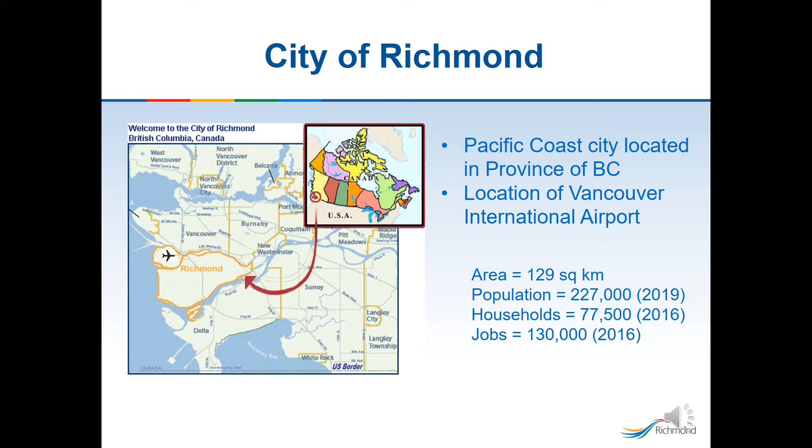What triggered the need for the study? From 2013 to 2017, there was a substantial increase in vehicle-to-vehicle collisions in the city. In fact, at the study locations, the number of collisions increased 8.7% on an annual basis, which outpaced the population increase of 1.7% per year in the same 5-year time frame.

This increase in collisions and continued concerns from the public led the city to undertake a citywide collision review. The city partnered with the Insurance Corporation of BC and hired ISL Engineering and Jeff Ho Engineering consultants to carry out the study. There are two key study objectives.

One, we want to identify and prioritize locations in a systematic manner. At the end of the day, we want to make sure the process and methodologies are objective, transparent, and easy to understand in how the highest collision-prone locations are identified. The second key objective is to determine what safety improvements will achieve the greatest safety benefit.

So with that brief introduction, I will turn the presentation over to Paul, who will be going over the details of the study methodologies. Paul?

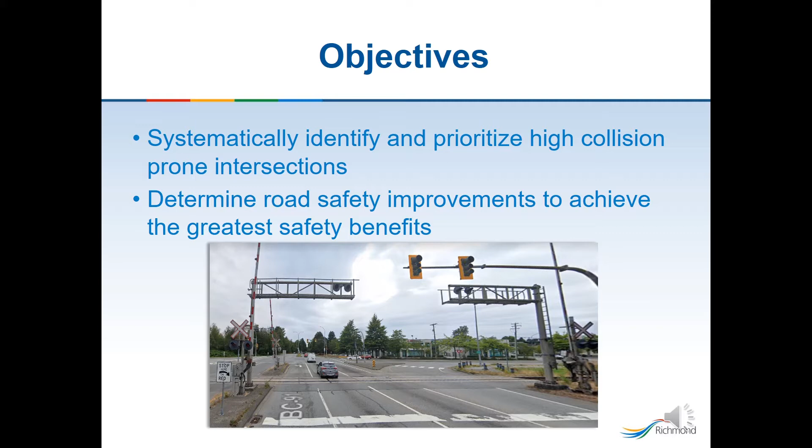Thanks, Fred. The first step of the methodology was the initial screening, which consisted of reviewing ICBC claims data and conducting a safety performance analysis. Based on standard practice for road safety review studies, ICBC claims data for a 5-year period beginning at the start of 2013 to the end of 2017 was collected and reviewed for citywide intersections.

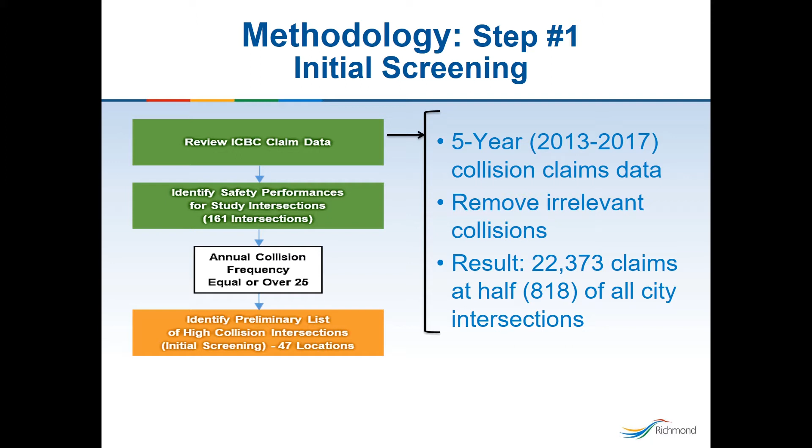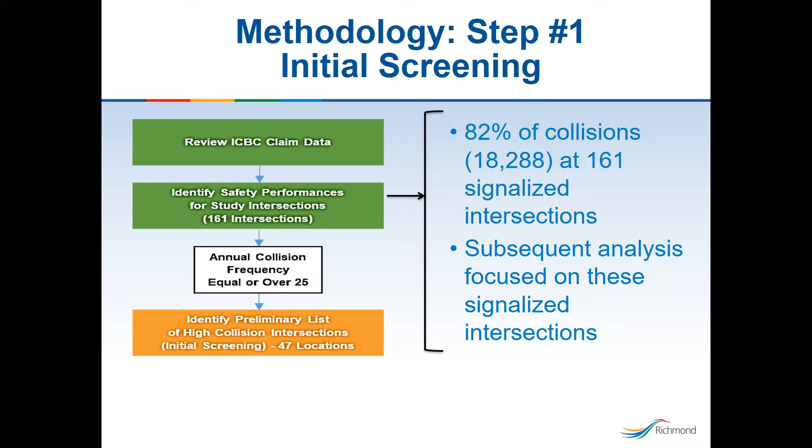After removal of irrelevant collisions, such as those at parking lots and unknown locations, over 22,000 claims were identified at 818 intersections, 161 signalized and 657 unsignalized. It was found that 82% of the total collisions occurred at the 161 signalized intersections, so the study focused on these intersections.

Based on the TAC Road Safety Review Guide and previous similar network screening studies in the province, annual collision frequency was selected as the initial safety performance indicator to determine the high collision intersections out of the 161. By applying this safety performance indicator, it resulted in 47 intersections. These 47 intersections accounted for only 29% of the total signalized intersections, yet 65% of the total collisions.

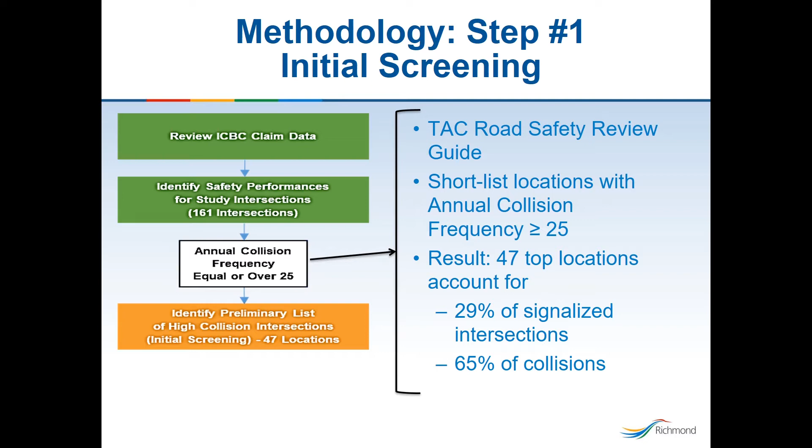For this study, a heat map was developed for the total number of 5-year ICBC claims data at the 47 intersections. Several of the high collision intersections were actually located within the city center.

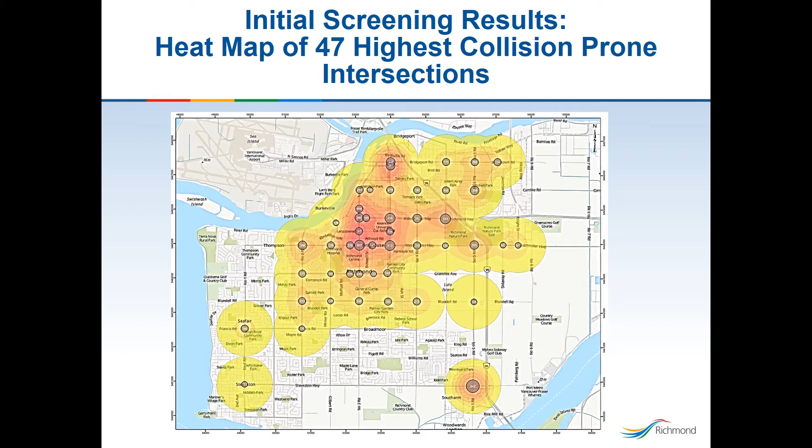Secondary screening of the 47 intersections consisted of determining the intersections with planned and completed improvements and applying additional safety performance indicators, such as collision severity index, collision rate, pedestrian involved collisions, and the highest collision severity index, to identify the top 20 collision-prone intersections. Traffic volume data for the intersections was collected as well, since it was required to calculate some of the additional safety performance indicators.

Intersections with planned modifications and recent improvements completed during the 5-year period for the ICBC claims data were removed. There were a total of 6 intersections out of the 47 high collision intersections identified that were removed. The remaining 41 intersections were further screened based on 3 safety performance indicators.

Collision severity index, greater than the city's average of 4.5, which accounts for the collision severity. This resulted in 25 intersections.

Collision rate, observed collision rate greater than the critical collision rate, which accounts for the collision pattern randomness. This resulted in 9 intersections.

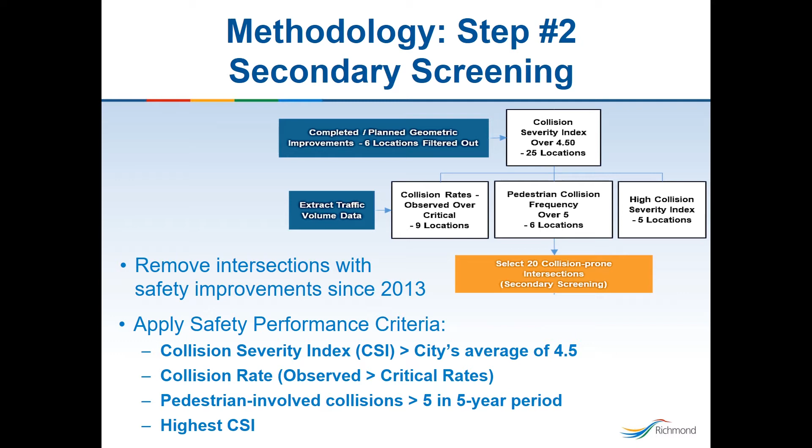The intersection of Garden City and Blundell Road had a low annual collision frequency, yet the highest collision severity index out of the top 20.

There were 14 intersections that had collisions involving pedestrians. There was a total of 75 pedestrian-involved collisions for the top 20 intersections.

Fatal collisions were found at 8 of the intersections. There was a total of 10 fatalities that occurred for the top 20 intersections.

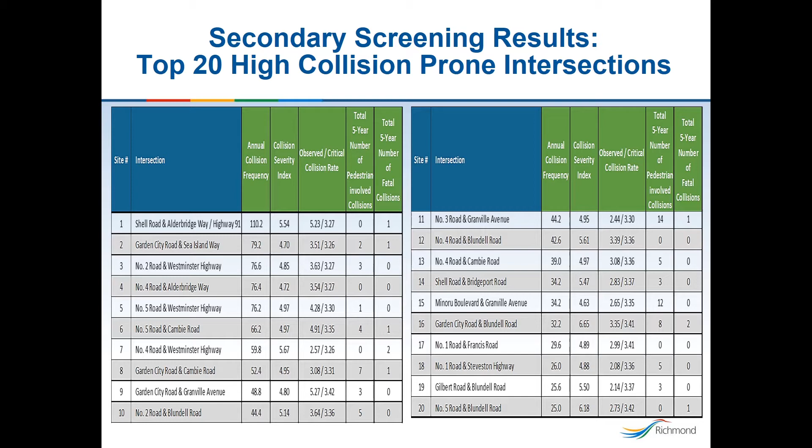The next step was to conduct field review observations for each of the top 20 collision-prone intersections and identify potential safety issues using the TAC Site Visit Sample Observation Report from the TAC Road Safety Review Guide.

The collision analysis for each of the top 20 collision-prone intersections focused on the most recent available 3-year period ICBC claims data to establish the collision patterns.

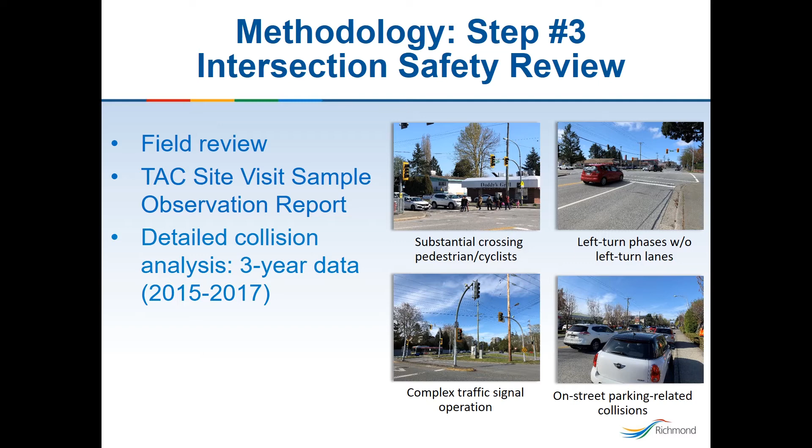Field observations and safety issues were divided into 5 categories: operational, geometric, traffic signal, vulnerable road users, and other.

Examples of operational included significant lane changing and weaving, high vehicle speed, on-street parking, and congestion or long queues.

Geometric included things like misalignment of dedicated left turn lanes, horizontal curves before or after the intersection, and driveways near the intersection.

Observations and issues related to traffic signal included limited signal visibility, lack of a left turn phase, and long gaps for pedestrian crossing green time after a red signal for vehicles.

For vulnerable road users, significant number of pedestrian and cyclists crossing the intersection, long crossing distance for pedestrians, and inconsistent pedestrian and cycling facilities were noted.

Others included such things as missing road signs and insufficient lighting.

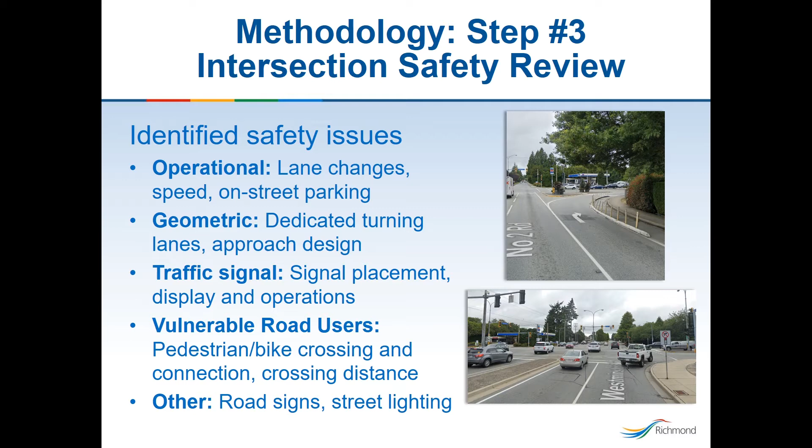Based on the field review and collision analysis, improvements and the potential safety benefit was identified for each of the top 20 collision-prone intersections. Examples of short-term improvements included adding and improving signage, pavement markings, signal modification, improving sightlines, and enforcement.

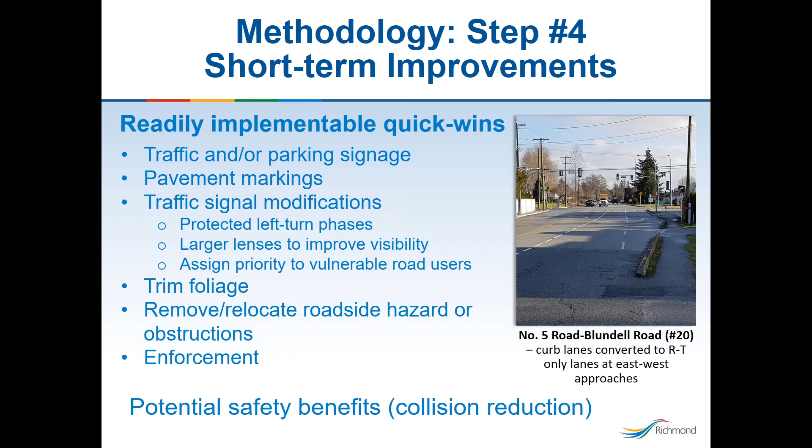Examples of medium to long-term improvements included road geometry changes, such as adding or lengthening turning lanes, redesigning channelized right turn islands, or road widening at intersections to add additional lanes or at constrained locations.

Also included, as part of the road geometry changes, would be completing pedestrian and cyclist connections and relocating driveways near the intersection.

Given the complexity, a detailed design will be required to determine the exact scope and cost for the recommended medium and long-term improvements at the top 20 intersections.

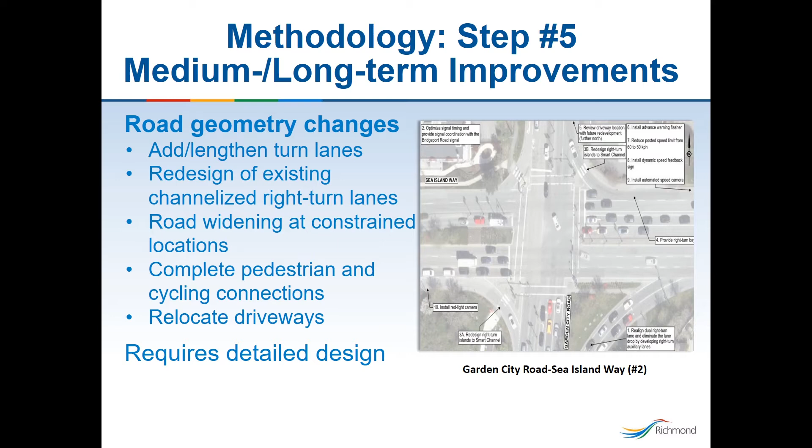Intersection safety review reports were prepared for each of the top 20 collision-prone intersections. The reports included information about the intersection, a photo, collision stats, field review results, potential improvements, and the safety benefits.

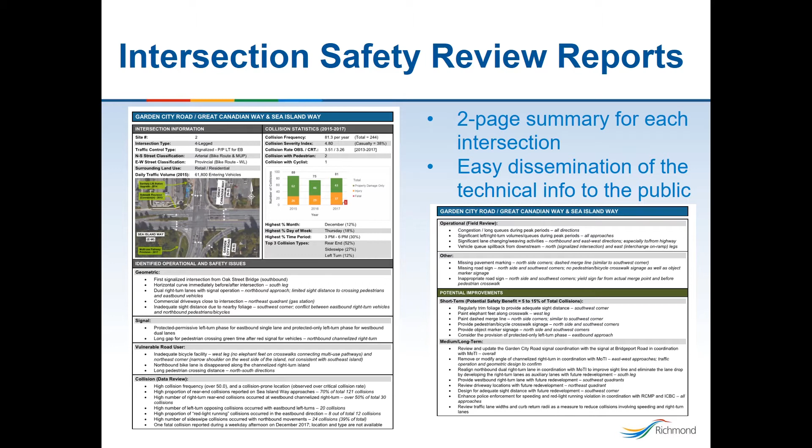Study findings were presented to Richmond City Council in June of 2019. Council approved funding of $500,000 to implement short-term improvements at all the top 20 locations.

As of today, approximately 75% of the program is complete, and the remainder is to be completed by the end of Q1 2021. These short-term improvements are expected to reduce collisions by 5 to 30%.

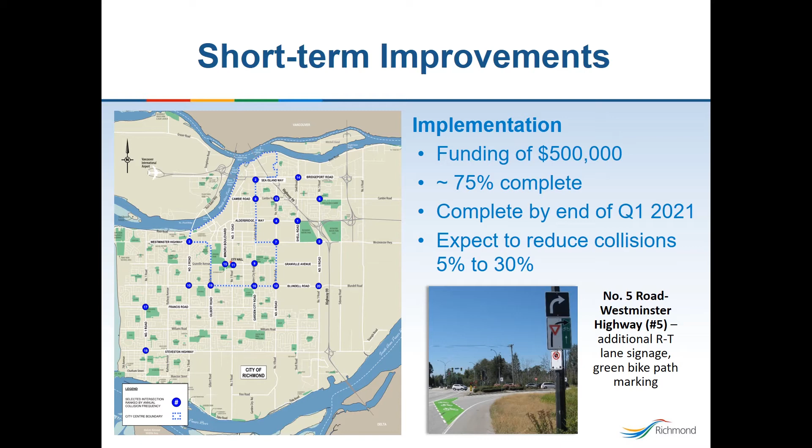The following is an example of a short-term improvement. This is Number 4 Road at Blundell. It is ranked as number 12 of the top 20 locations.

It is a typical 4-legged intersection in the city. Average collision is over 42 collisions in a year with a severity index of 5.6. The study found that there is a high portion of collisions involving left turn opposing traffic.

The solution was to convert existing center lanes, which were shared through left turn lanes, to left turn only lanes in the eastbound and westbound directions, at a cost of approximately $25,000. The anticipated collision reduction is 10 to 20%.

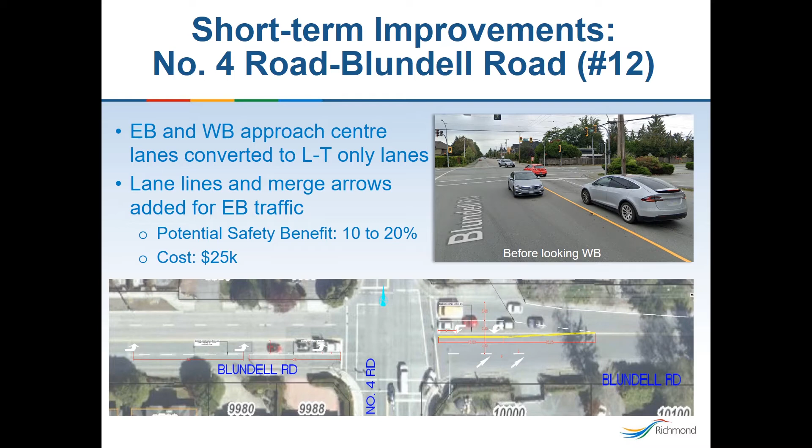Richmond City Council also approved funding of $600,000 to carry out designs and confirm the project scope for the medium and long-term improvements at all 20 locations. The designs are currently underway and are expected to be completed by Q2 2021. Council also approved a multi-year capital program for implementation of these improvements, with a budget of $2.8 million for 2020 and $12 million for 2021 to 2025.

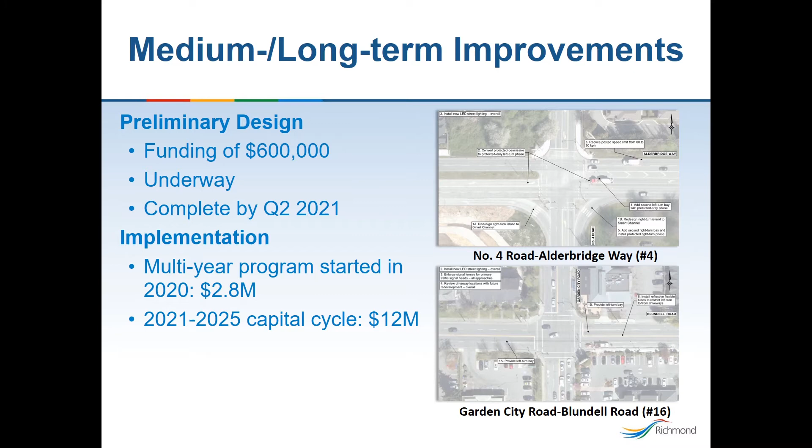The following is an example of medium and long-term improvements. This is Number 5 Road and Cambie Road, ranked number 6 of the top 20 locations. The average annual collision count is just over 76 collisions per year, with a severity index of 4.87. The study found a high portion of collisions involving left turn opposing traffic.

As a 2020 capital project, the scope includes reconstructing the entire intersection to add a new left turn lane on each approach. We'll also be providing multi-use pathway connections at the intersection, which will align with the city's OCP.

The detailed design is currently underway, and construction is scheduled to commence in late 2021 at a cost of $2.8 million, with 50% funded by TransLink. It is anticipated that with these improvements, we could see a reduction of 40% in collisions.

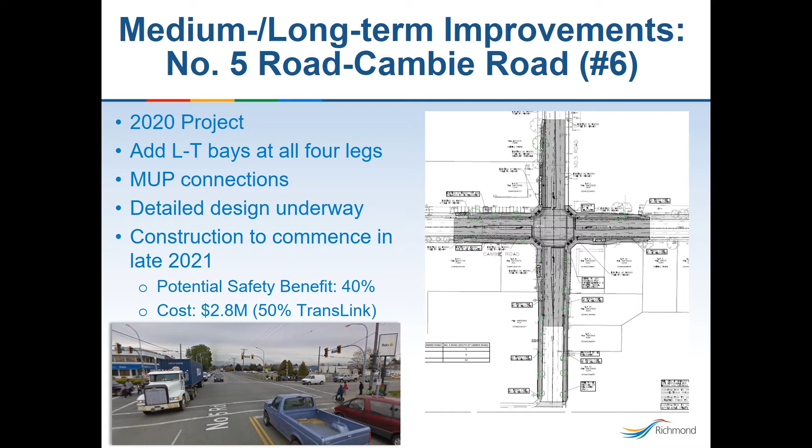As part of the city's capital program, the following two intersections have been approved by Richmond City Council for 2021. The first is Number 2 Road and Westminster Highway, ranked number 3 of the top 20 intersections. The scope includes adding a second left turn bay and extending the existing left turn lane storage at the westbound approach, redesigning the existing channelized right turn lane at the northwest corner, and traffic signal modifications.

The other intersection is Number 4 Road and Cambie Road, ranked number 13 of the top 20 intersections. The scope for this intersection includes adding left turn bays at all 4 legs of the intersection.

The detailed design for these two intersections is to commence in late 2021, with construction expected to commence in late 2022. The potential safety benefit ranges from 40 to 80%. The total cost for both intersections is $3 million, and 50% will be funded by TransLink.

I will now turn the presentation back over to Fred, who will go over the city's safety initiatives, monitoring program, and the lessons learned from the study. Thank you.

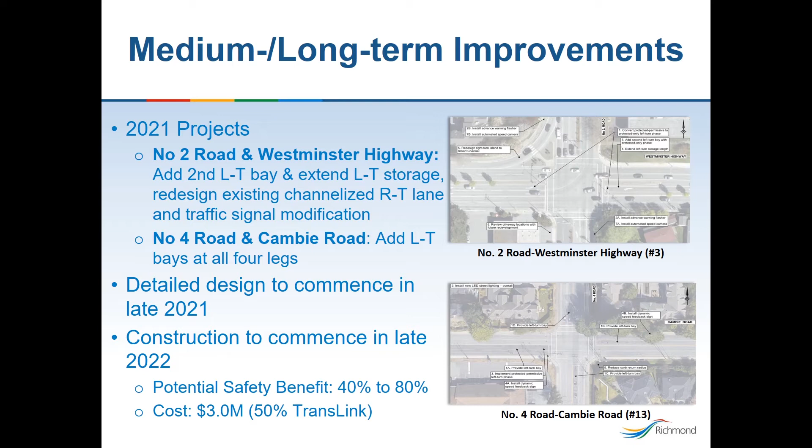Thank you, Paul. In addition to the road safety improvements that Paul has talked about, the city also started a new capital program in 2020 to remove or modify right turn channelization islands. The objective of the program is to reduce right turn vehicle speed and mitigate conflicts between pedestrians and right turning vehicles. The new program has dedicated funding of $800,000 to $1 million per year, with a target to upgrade 2 to 3 locations every year.

The city started with locations that have the highest pedestrian conflicts and activities. In 2020, channelized islands at 2 locations were identified for removal. The picture below shows one of the locations, where you can see that the existing channelized island is relatively small, with limited refuge area for pedestrians.

The figure on the bottom right shows the proposed enhancement, involving removal of the channelized island as well as converting the existing pedestrian crossing operation so that all pedestrian movements at the intersection are controlled by the traffic signal.

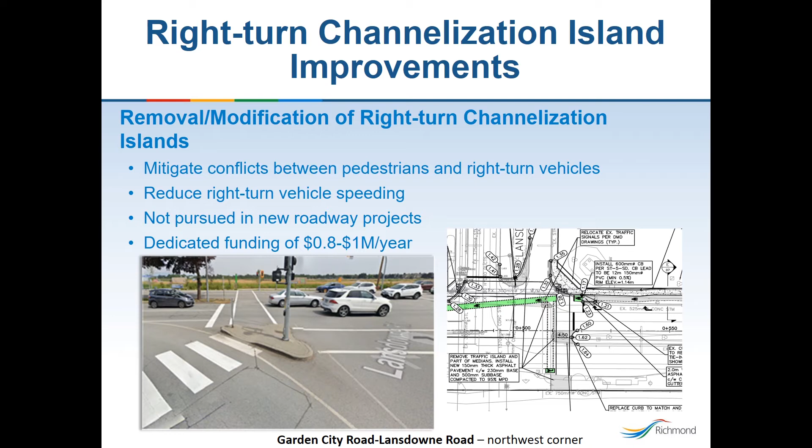In addition to capital infrastructure projects, the city has made changes in its road design approach, including changing or reducing the curb return radii requirements. This is to address conflicts between pedestrians and right turn vehicles by slowing down right turning vehicles at intersections. Changing the curb return radii also provides additional pedestrian refuge areas at intersections. The updated curb return radii requirements were incorporated into city design specs in August 2019.

The other key change is road dieting, where in all new capital projects or retrofit of existing roadways, road dieting opportunities are pursued. This is intended to deal with the chronic speeding issues observed along arterial roads.

For example, as part of a planned cycling network expansion project for a new 4.8 kilometer off-road multi-use pathway along Stevenson Highway, the existing roadway will be reconstructed with road diet measures comprised of narrower lane width and intersection treatments to enhance the safety of vulnerable road users.

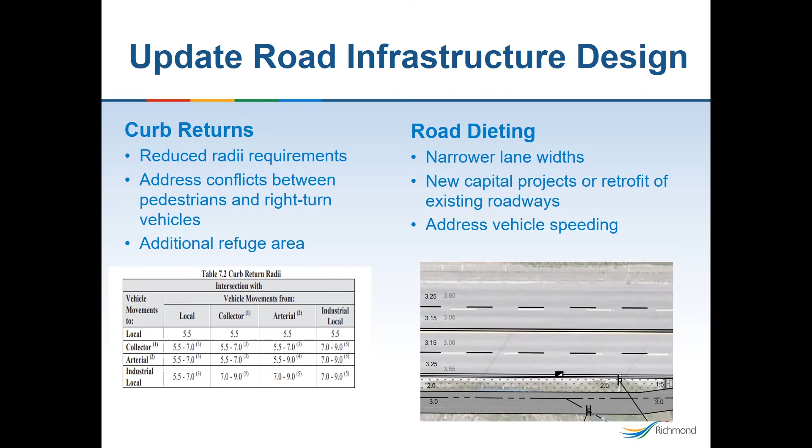Other changes in road design approach include an increased focus on providing physical protection for vulnerable road users. This is pursued in all new capital projects, as well as retrofit of any existing roadways.

The other change is the increased use of emerging technology. As an example, we started using automated traffic conflict analysis with captured video data at intersections to help predict, diagnose, and address road safety issues, including near misses. This allows us to implement measures that are otherwise not obvious or identifiable in traditional safety analysis.

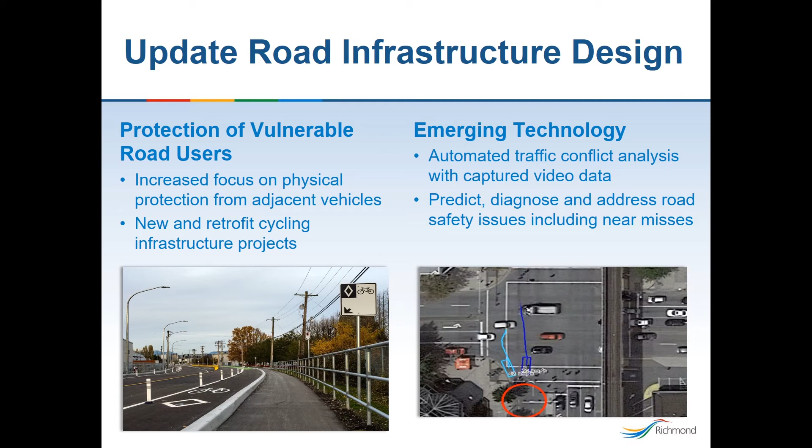To gauge the effectiveness of the safety initiatives, the city will be monitoring vehicle speeds on high-speed corridors continuously, 24/7, with the use of cameras as well as reader boards. The city has a very ambitious goal to have a total of just under 130 locations equipped with cameras and speed reader boards by the end of this year. These locations will be capable of measuring and recording vehicle speeds.

We are also looking at future installation at an additional 70 locations for cameras over the next 10 years, as we continue to expand our fiber optic network.

In addition, to monitor the effectiveness of the safety initiatives, we'll be carrying out after-studies to assess the effectiveness of the implemented safety improvements in reducing the frequency and severity of collisions. Also, our intention is to update the network screening studies, done in 2019, every 3 to 5 years.

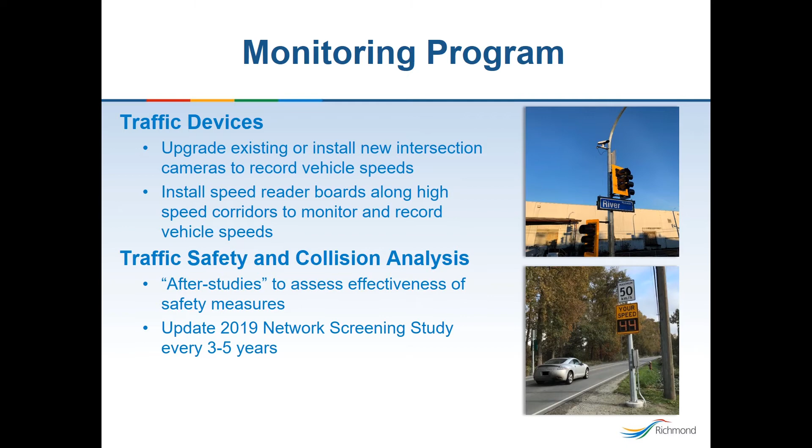Lessons learned: we found that a lot of effort went into collecting data and best practice research, so early planning and coordination was necessary to meet the project timeline. Also, early engagement with key stakeholders and the public is critical. This develops a sense of ownership of the project by key stakeholders, and by talking to the public early on we were able to capture localized issues or concerns that were not identified in the safety analysis.

The key project benefit, at the end of the day, is that this project was deemed very successful by the city because the data-driven analysis enabled the city to prioritize in an objective manner where funding should be put towards. It also justified to the public and elected officials why certain locations are given priority over others.

So that concludes our presentation today, and Paul and I will be happy to answer any questions. Thank you very much.